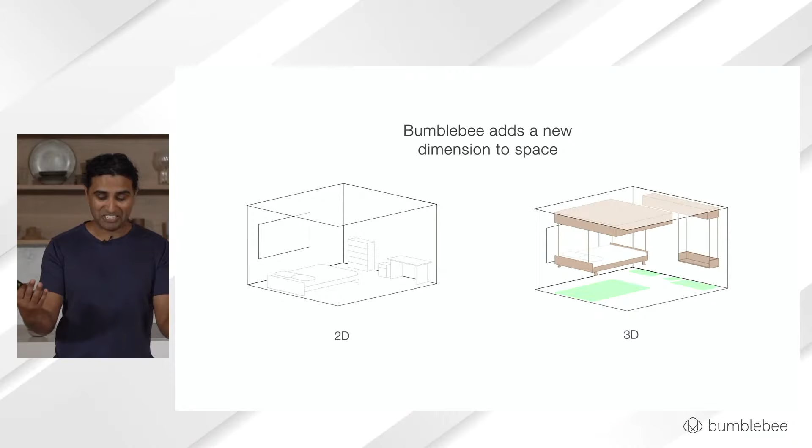And everything today sits on the floor. Everything is parked - this is how we're optimizing homes. We look at a plan called a floor plan, a really bad plan by the way. We just look at everything in floor, 2-dimension, and we're not optimizing it very well.

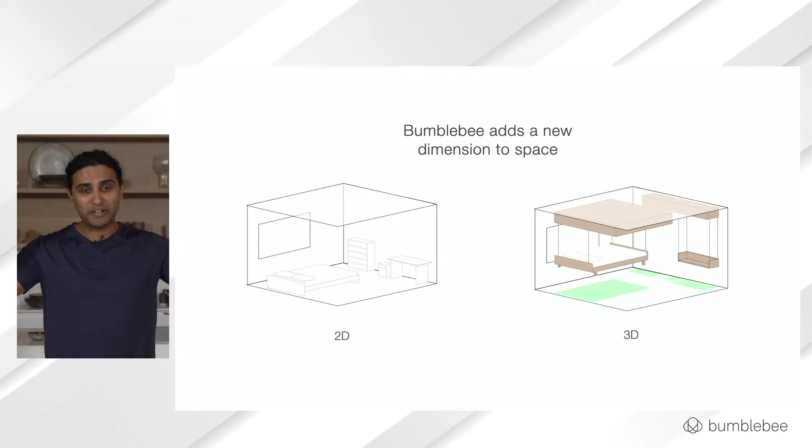We kind of flip this around. This is the secret of Bumblebee - the conspiracy is we take power tools, we take furniture, and we flip the problem upside down, basically creating functions when you need it. And when you don't need it, it completely disappears, giving you a fully spacious, fully transformable, fully useful space.

So you look at this, this is a 3D view of our showroom unit, which basically has a kitchen, a living room, a bedroom, a workstation, a closet, everything embedded inside. And the footprint, you lose no amount of quality of living. That's Bumblebee. And you unwrap this, it's like adding space - like adding square footage. But thinking about the world in square footage will be obsolete. It's paradigm shifting.

So we take this 3D and overlap it, you unwrap it, and you'll see that you're getting 50% more space or more, depending on the type of products that we install. This is the way Bumblebee works - we don't ship motorized Murphy beds, we don't ship you shit furniture, excuse my language. It's really high quality, function first, and happens to be beautifully efficient.

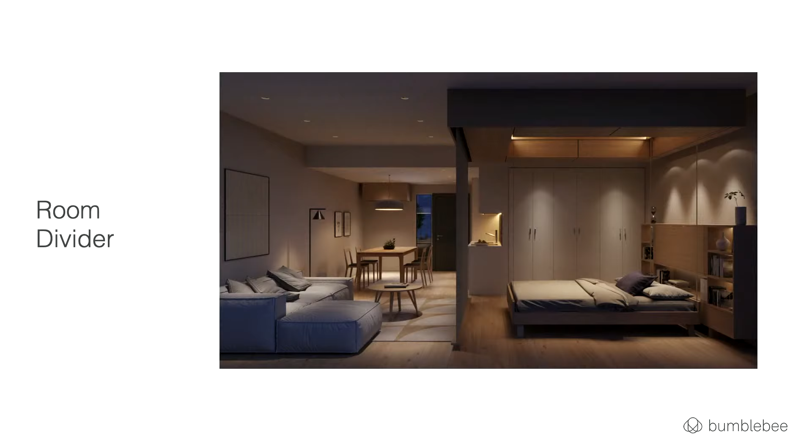Some other functions that we're exploring are adding a room divider. Just by adding another unit to the box, we can add a room divider to divide the space in 2. All of this can be controlled right from the app.

Here's also an example of a projection screen. So you could just in one touch transform your entire space into a home theater.

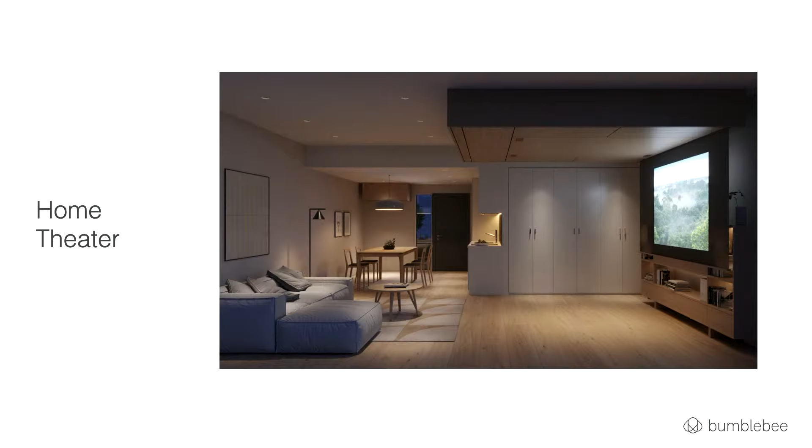Yeah, there's been a lot of design elements, and this is just a small teaser into the things we're building on the same platform. Building like the wall divider, one of my favorites. We'll be pushing out some of these hardware updates, and today we're in Bumblebee bedroom, Bumblebee office. Very soon we'll be taking over Bumblebee kitchen and living room dividers, home theaters. This is how people will live.

So next up, we're going to get into the engineering bits and pieces. We're starting off with the brain of Bumblebee, which we've codenamed Project Yoda, our ground-up compute platform. And to talk about it, here's Dr. Aaron Licata.

Thanks, Sankarshan. Hello everyone, my name is Aaron. I'm the tech lead in the perception and AI team at Bumblebee. Today I'll be talking about the perception stack here at Bumblebee.

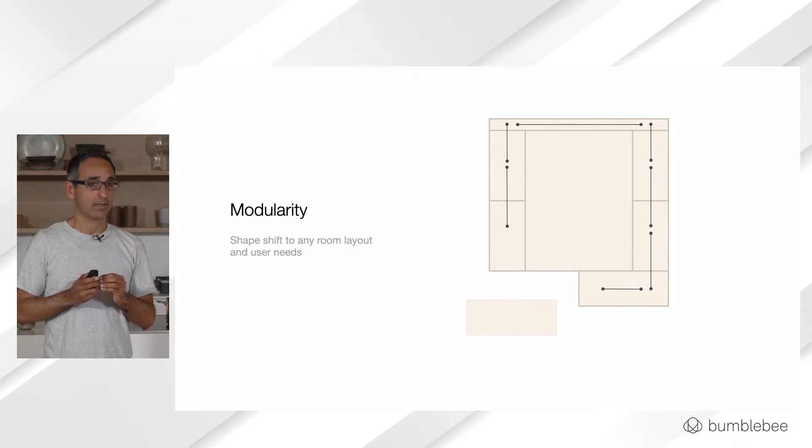One of the central aspects of the Bumblebee design is certainly human safety. For that to happen, we built a sensing system that is aware of the space around it, so it's able to detect when someone is under the unit, what piece of furniture is nearby, and it lowers the units only when the area is clear and safe.

Today we've converged to an optimal system built around LiDAR sensing, which is hidden away, unintrusive in your home, and also designed with privacy in mind, where all the computing—the depth estimation, the distance estimations—are all computed locally on the edge, and no data is shared in the cloud.

Also, the system has reached a strong level of robustness, 2-centimeter accuracy, which opened up the ability to sense, for example, the legs of an infant, or the fine structure of furniture such as the legs of a chair. And we've improved our ability to pre-calibrate the sensors so we can install them in the field very easily and fast.

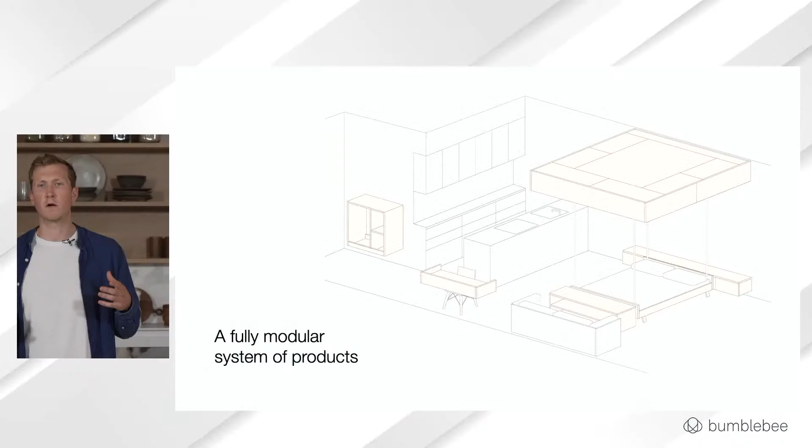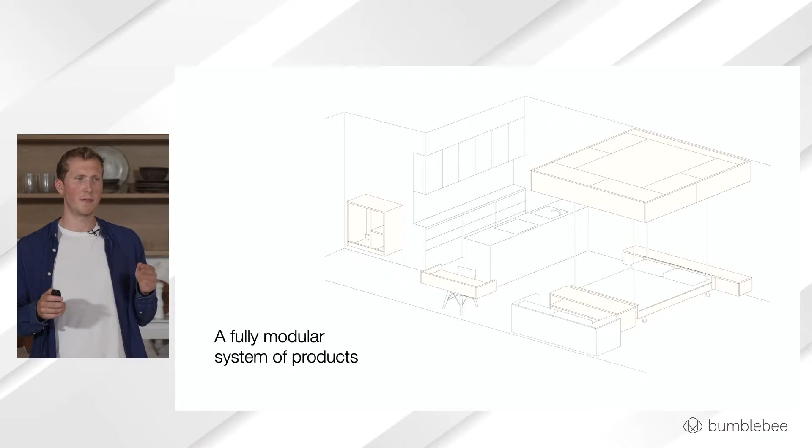At its core, Bumblebee hardware architecture is composed of discrete building blocks. A modular approach allows us to work with many different floor plans, and it allows residents to choose what they need, where they want space, and literally put it right where they want it. We like to say that we only sell one product, but we sell many different configurations. This graphic shows a complete Bumblebee suite, but residents can actually choose how many beds, storage boxes, or desks that they want. The amazing thing is that we can do this without any additional BOM complexity or additional product SKUs.

The ceiling robots are the building blocks of our system. This is the atom that builds the Bumblebee molecules in every apartment and home. This design has been iterated on constantly, and the process has yielded a robot that can be manufactured quickly, installed easily, and is compatible with various payloads, from storage boxes, desks, pantries, and wardrobes. To borrow the skateboard terminology from the automotive industry, the ceiling robot is our skateboard. It's designed in such a way that the size can be modified with relatively lightweight engineering, and its payload can be swapped out for a variety of applications.

A major challenge that our team is working on for the next 6 to 12 months will be tooling up many of these core components for high volume production. Here are a few examples.

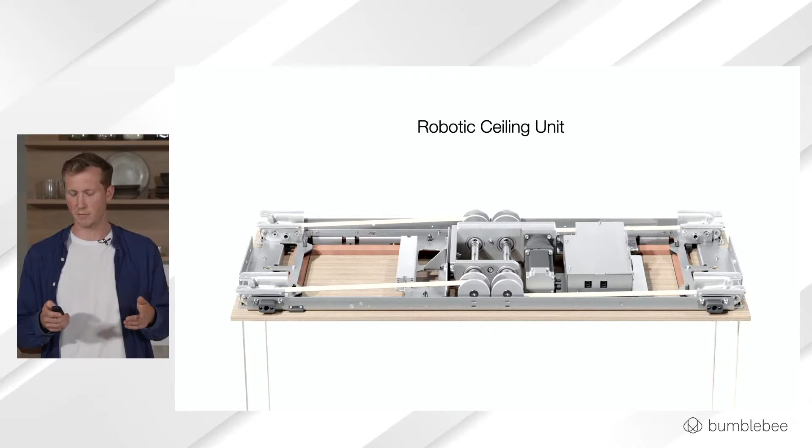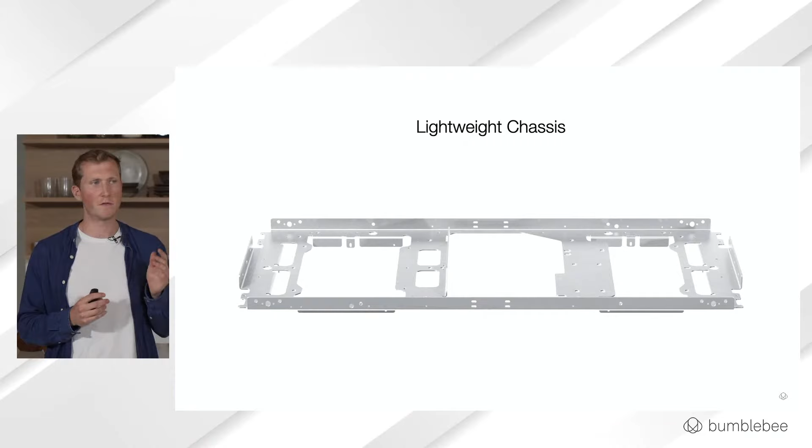The low-hanging fruit is the chassis. We've taken everything we've learned from previous generations of robots and integrated most of those features into this one part, which will be produced by a single process. In doing so, our robot BOM has been reduced in size by a third, and all assembled parts now relate to a single major GD&T datum on this chassis. This is a major achievement for us from both manufacturing and quality perspectives.

Because our use case is so well defined, we have the luxury of using a very precise operating envelope where we don't need to waste material or cost on high-powered motors. The centralized drivetrain does all of the work of the system without the aid of torsion springs or counterweights. We've designed the drivetrain with two principles in mind: reliability and quiet operation. With testing running day and night in the workshop, we have confidence to offer a lifetime warranty on our drivetrain.

Structural nodes transmit the load directly from the box to the rails, allowing stress to flow in a relatively straight line from the box through the webbing and up into the ceiling. By isolating these load paths and streamlining them as much as possible, we have removed both material and complexity from the rest of the robot.

Electronics consolidation was another major step in our robots becoming completely modular, with identical computes and harnesses in every single robot. As Aaron mentioned, the robot board provides the intelligence of the Bumblebee that our users interact with, from load sensing to safety and delivering your bed at a moment's notice.

Bring it all together, you have our Bumblebee robot. The magic of Bumblebee really exists in just one of these units, but units can be added or subtracted to provide a tailored living experience for every resident.

Our industrial designers and furniture engineers collaborate with an incredible attention to detail. Bumblebee residents use the product multiple times a day, so every detail from shapes to textures and sound can have a huge impact on their living experience.

The bed feet, for example, are completely passively actuated and are fully self-contained in the 1-inch thick headboard panel. When deployed on the floor, the bed feet give the bed an extra 5 inches of lift to provide a comfortable height to sit, lay, or jump on. When raised into the ceiling, the feet retract to maintain the flush appearance of the system.

A problem that we grapple with every day is how can we optimize for rapid assembly without sacrificing on quality? Our approach is to ensure no small elevators or narrow hallways are ever an obstacle to our product installation. All of our furniture is either flat packed or modular to reduce carbon footprint during shipping and reduce cognitive and physical stresses during installation.

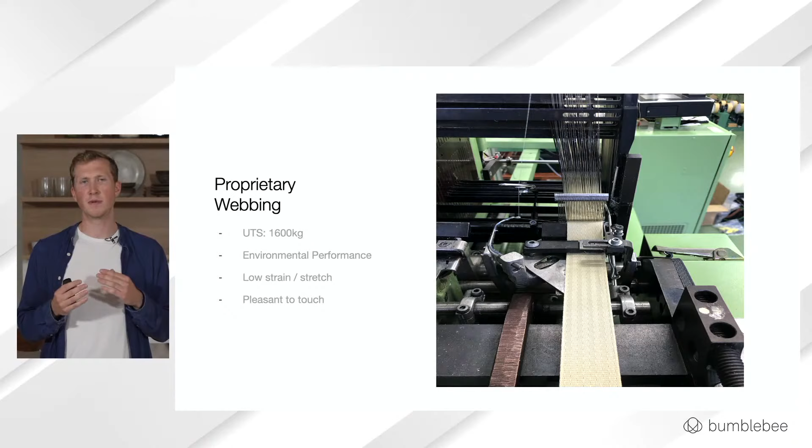The molecular structure of the fabric itself provides superior chemical resistance, cut resistance, and flame resistance compared to aramids or other synthetic polymers. A custom engineered weave and stitch also give each strap an ultimate tensile strength of 1,600 kilograms force. With 4 webbing straps per box, that means the webbing carrying capacity is equivalent to more than 3 base model F-150 trucks.

We wanted our full system to be completely agnostic to ceiling construction. Even when fully loaded, the weight of our system is within 11 to 18 pounds per square foot. Compared to California building code, which requires that buildings be constructed to support a minimum of 40 pounds per square foot, we're actually a very lightweight system. We're able to install our system in any ceiling that is constructed with either concrete or wooden joists.

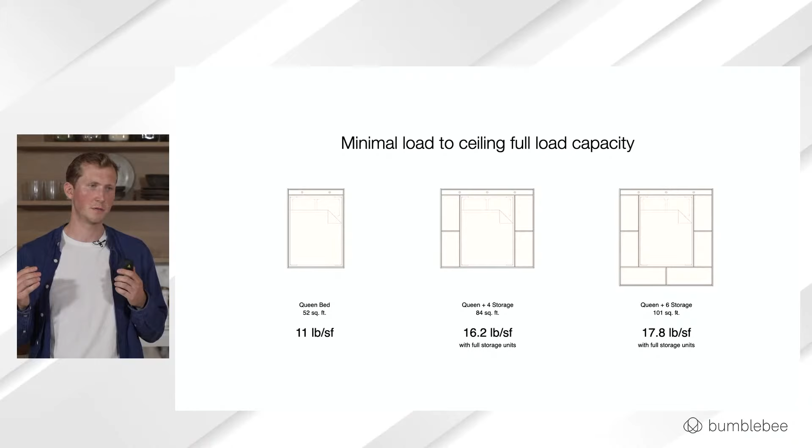Hello, I'm Fisher Johnson. I'm the product operations manager here at Bumblebee Spaces. My team's chief task is crafting the supply chain and installation strategy for this amazing product.

When I was first introduced to Bumblebee, I got really excited about the product's ability to transform the way the world thinks about the cost of quality living space. It's an incredible vision, but one that only comes to fruition if we're able to operationally deliver Bumblebee at a radical price discount to the cost of traditional furniture. And that's exactly what we're doing here at Bumblebee.

As the hard and soft costs of traditional urban construction continue to go up and up, Bumblebee is only getting more and more efficient. We're doing this by moving the generation of space upstream to the factory. That's why today my team is focused on efforts to deliver Bumblebee space at 1/25th, or 4% the cost of traditional construction. If we're able to do this, it's going to transform absolutely the way that developers, homeowners, and residents all think about the cost of their living space.

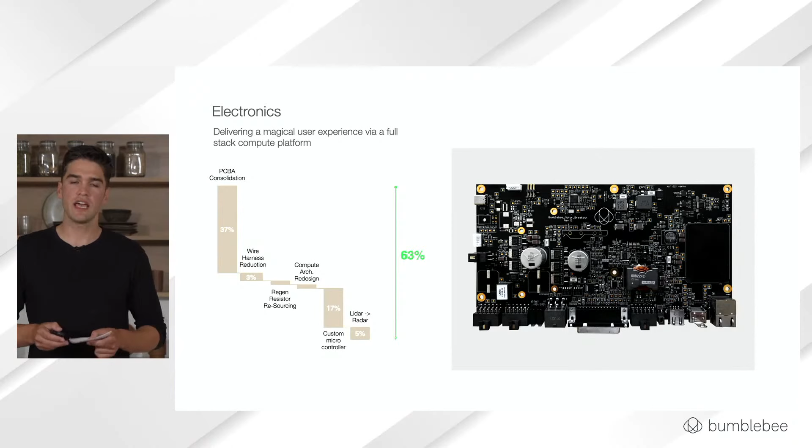One of the areas where we're already employing some really advanced high volume techniques is in the construction of our furniture payloads. Everything we've done operationally and product design-wise has been centered around delivering an environmentally conscious, predictable, and beautiful product.

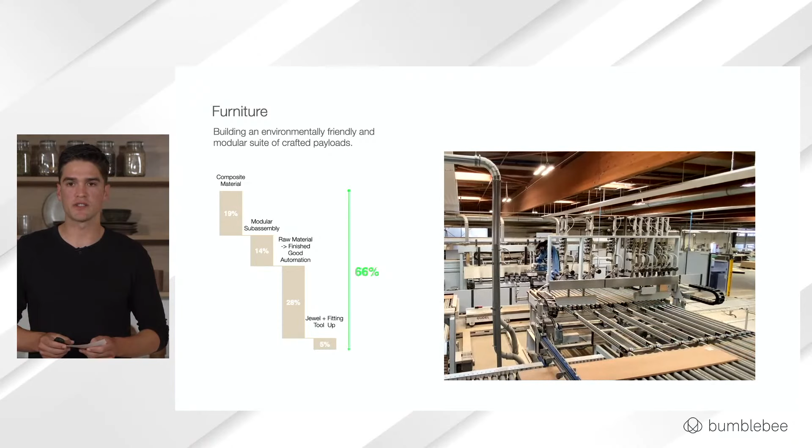We've also, with the furniture, rolled in a Forest Stewardship Council certified plywood substrate, which has made our product maximally eco-conscious, which is something that's really important to our market.

Here you can see some photos from our most recent batch of production, and I'm really excited about what this means for the company. When I first joined in late 2019, we were still hand finishing solid wood payloads in our office in San Francisco, and this was obviously not sustainable. But throughout the course of the pandemic, we've been able to get this line operational, which is able to produce incredible products for us while we're sleeping.

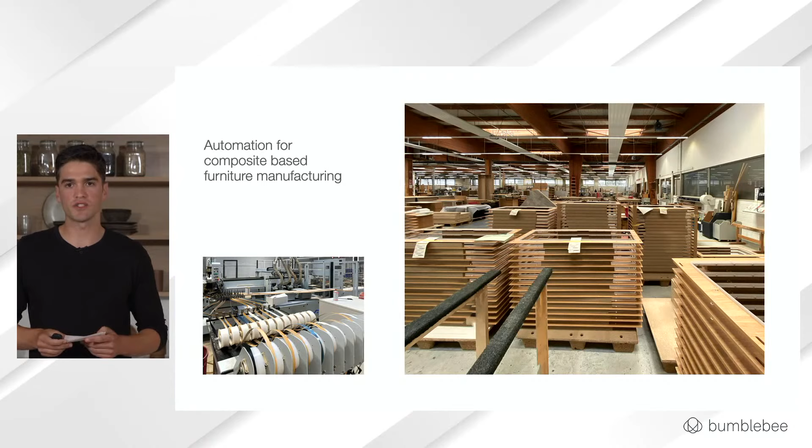On the robotics, at the core, what we're building is a low-cost BLDC drivetrain mechanism. If done properly, this product should scale and cost similar to that of a power tool. That's why we're investing heavily in our design for manufacturing, automation, and quality documentation to ensure that this scales reliably.

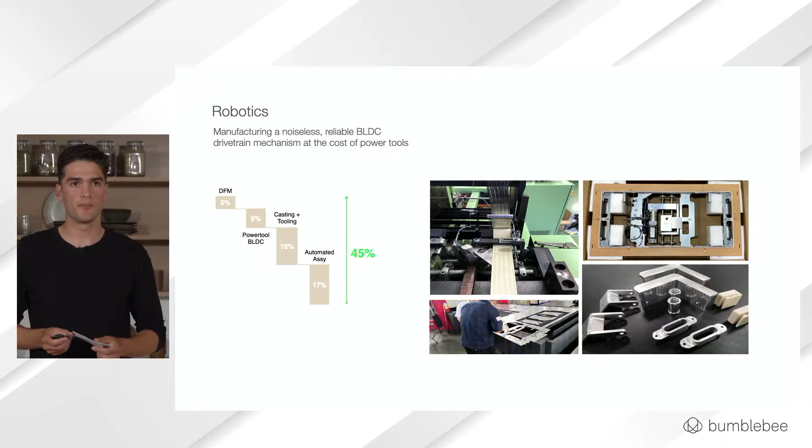Now to the most important part of our product, which we consider our installation. This is the bringing together of over 40 different electromechanical subsystems into the customer unit in less than 1 day.

When I first joined the company, we had engineers on site. This was taking days, if not weeks, but I'm excited to announce that at the end of last year, we installed a compact cluster in less than 1 day.

So this was really a massive effort across all of our teams. We designed an in-house installer app. We built installation jigs, we built a proprietary ceiling scanning method, and we had a real feedback loop between our operations team and our engineering team to ensure that this was a product-driven exercise more than just throwing people at the problem. We're getting to the point where by the end of next year, we anticipate being able to hand off installs to any third party or even have a DIY, do-it-yourself install offering. We're really excited about that.

And of course, we've been able to patent this entire process. Our installation process has been patented. All of the ceiling scanning, all of the installer app features, all of the calibration that goes into it is completely protected. A little shout out to Rico Zorkendorfer, one of our founding designers, who was able to drive a lot of the philosophy behind this process.